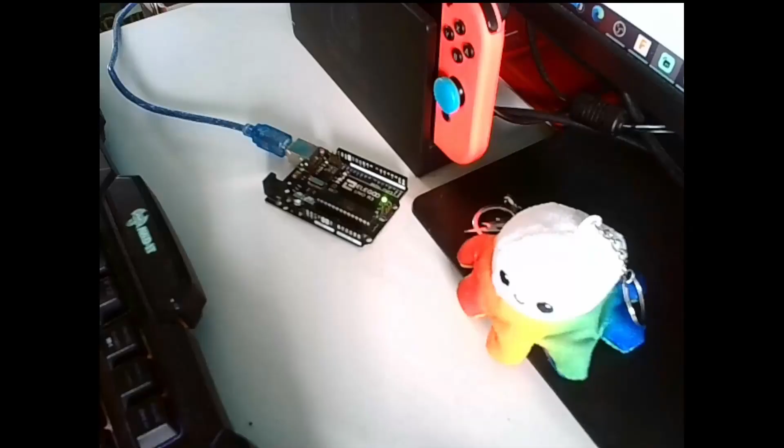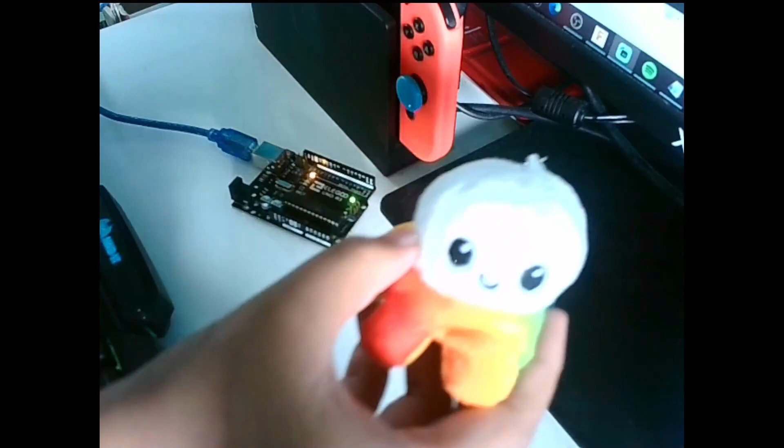So this is my desk, it's a bit dusty. I have my keyboard there. And this is just my mascot, soon to be. I haven't really done anything about him yet, but he's my mascot.

So we're going to be making this Game Boy in 3D modeling software. Before I get into it, first I'm going to be getting the measurements of all the sides, and we're going to be doing the full thing, including these little dips over here, the way this button is coming out. I'm not so sure about these two buttons because of the rounded edge, but I'll work on that as well. And even this little grille kind of thing. So let's get straight into the video, shall we?

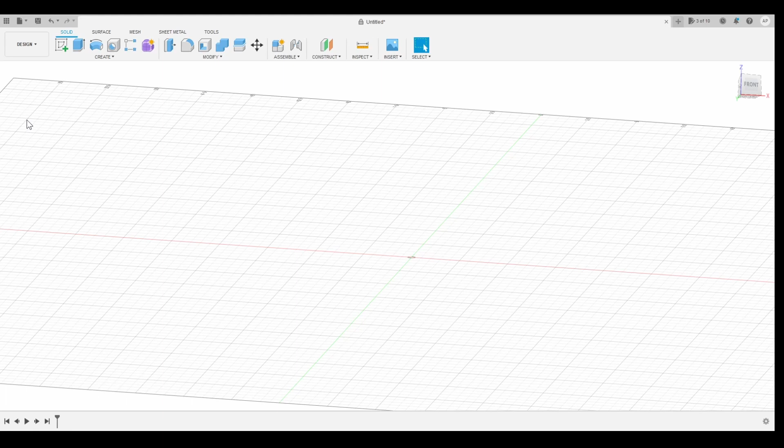So here it is, this is my 3D modeling software. I'm using Fusion 360, as I think I said before. Before we get into anything, you're going to want to go into your document settings and change your units to centimeters, which you just click the pencil and change it to centimeters. Then here where it says the origin, you want the yellow box, so if it looks different, click the button so you get it back. So this is what we want.

Our next step is going to be making the basic shape of the Game Boy, the cuboid, which I can show you now. So we're going to be making this basic cuboid that holds everything. After that, we'll do this fillet to get it rounded, and then we'll do the screens, and then all the buttons I might do in a part 2, so stay tuned for that. Anyways, let's get straight into it.

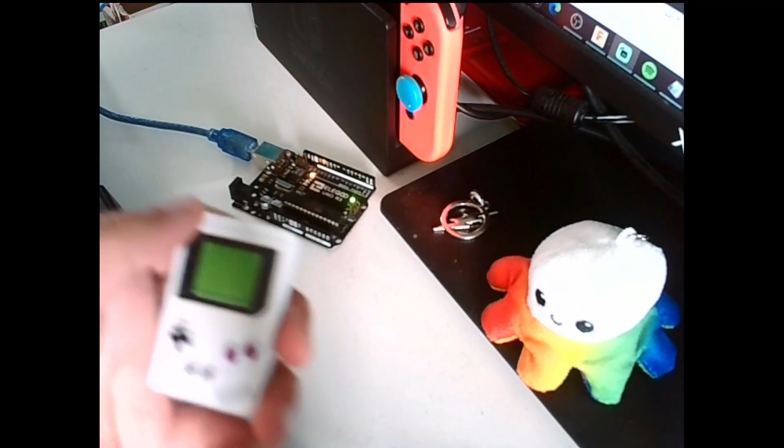So first I'm going to get my measurements. This is 3.3 centimeters, but we'll do 3.5 just to be on the safe side, 3.5 by 5. So let's get that into our modeling software. You can do 3.3, but just to be on the safe side, I'm going to be doing 3.5. So first things first, you're going to want to click this last plane, on the origin, the bottom one.

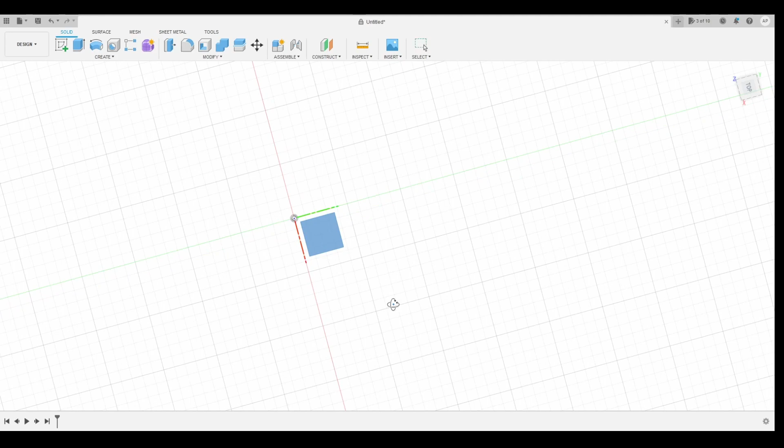Okay, give me a second guys, if I quickly get this back. There we go.

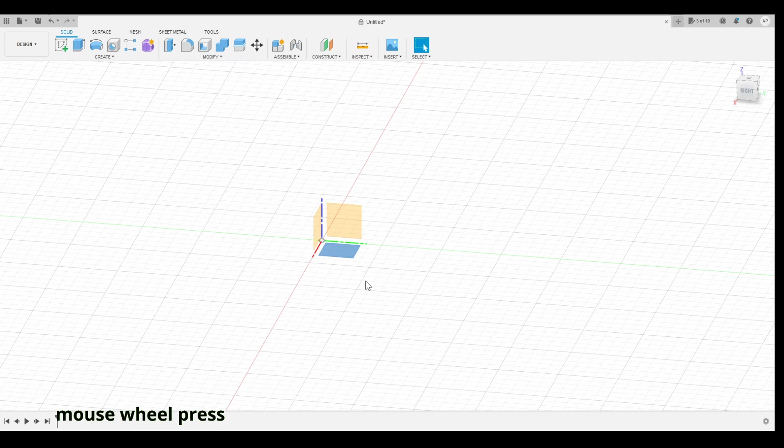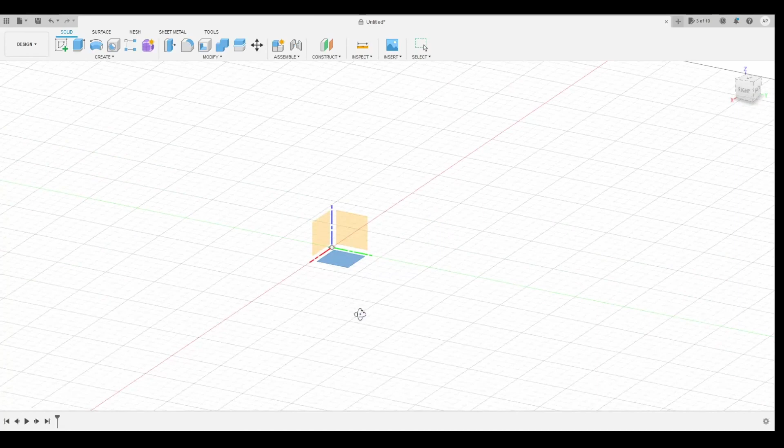If you don't know how I'm moving like this, that means you haven't watched any basic tutorials on Fusion 360. Basically, to pan from side to side, to move the actual thing, you're going to want to hold the mouse button. I'm not sure about laptop, but you can probably Google it. To move it in like this, it's the same mouse button, but you're going to want to hold shift then the mouse button, then you can move the tool. So this is the origin, this is where we're going to be making the Game Boy.

First things first, we're going to click it, then right click and hit create sketch. Now once we've done that, we're going to want to make a 2-point rectangle. A good tip is to use the S menu, the shortcut, so you can have everything you normally use right there, and it's different for your sketches and your normals, and you can even add things. For example, if I was extruding, I could just add my extrude in, but I usually just press pull.

You can add that there, but the shortcut for press pull is Q, so we don't need to do that. Let's make our 2-point rectangle. The best idea would be to do it like this. So like we said before, it's 3.5, and to move to the other one, hit tab.

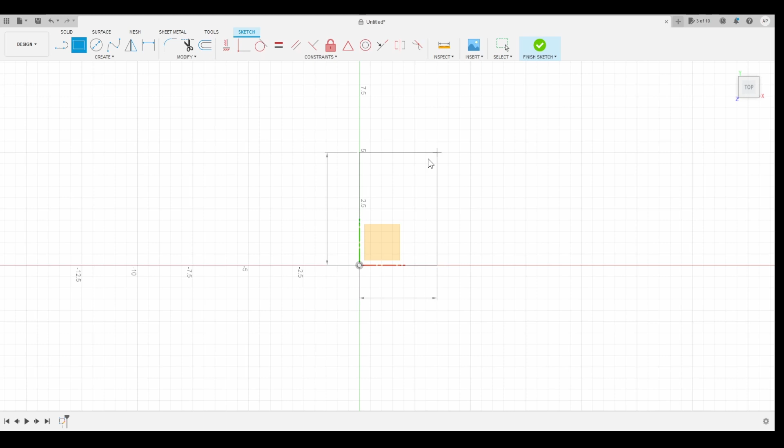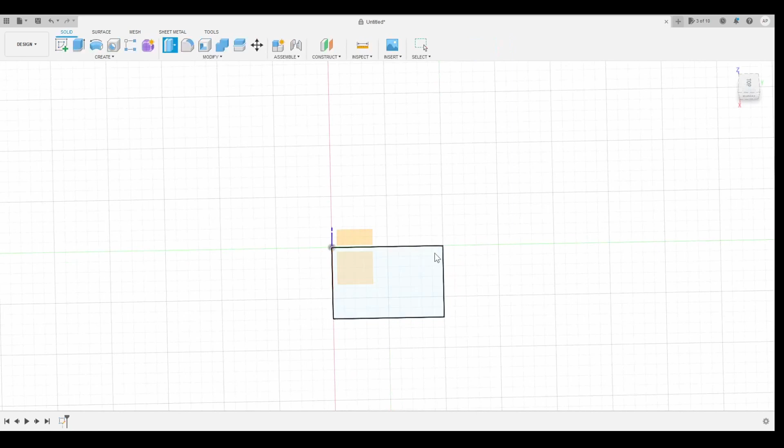And then 5, like that, and hit enter once you're done. So this is our basic shape, but if we look around, we can see it's 2D. We're gonna want to make this a cuboid instead of a normal rectangle. You can either extrude this or press pull. Like I showed you before, you can use the S menu, but for press pull, the shortcut is the Q key. I'm going to click Q, select this, and we're going to want to enter in our height.

So I'm going to quickly measure the model. Just so you know, the model isn't the actual size, it's just scaled down, which is much better in my opinion. But if you want full size, just replace all the numbers I'm doing with the normal size. I'm sure you can get it quickly with a Google.

Oh, that's not where it's supposed to be. Oops, sorry guys.

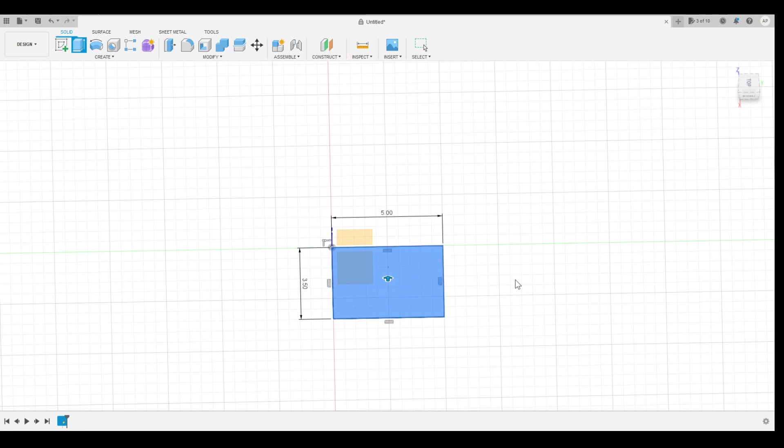Anyways, if we look, our height is 0.7, so 0.7 centimeters. We're gonna go here and type 0.7, then hit enter, and there you go. That is your basic cuboid. This is the exact same measurements, just this is a bit wider than my model.

The next step we'll be doing will be in episode 3, getting this into your slicer and then 3D printing, which will be all in one episode. If you don't know, I'm making this a Game Boy series. In the first episode we'll do the screens, in episode 2 we'll do the buttons, and episode 3 will do stuff like 3D printing it and putting it into whatever slicer you use.

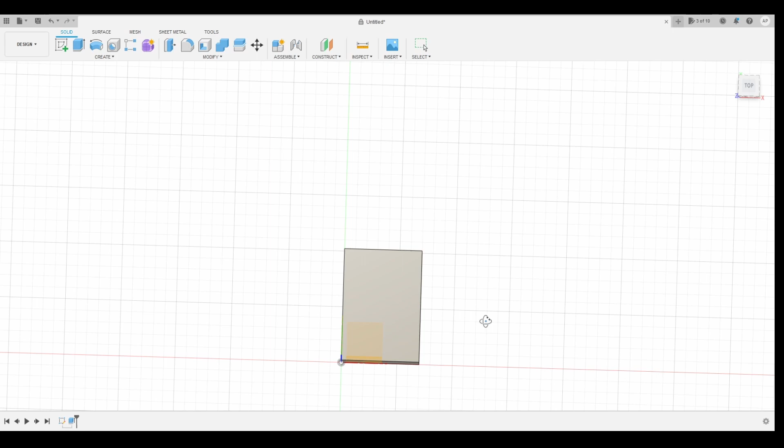So our next step is going to be making the screens. How are we going to do that, I hear you ask? We're going to want to click this, then right click it, and then click create sketch.

Next we're going to want to get our 2-point rectangle from up here, or you could use the shortcut menu, which is S. You can put it anywhere, just don't make it too big. I'm just gonna make it like this.

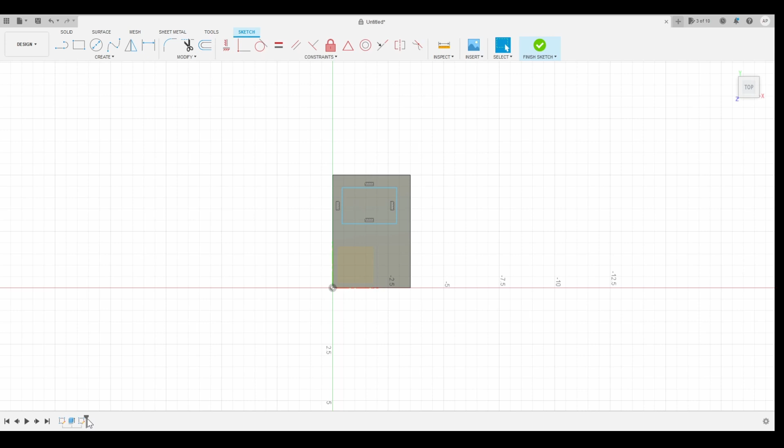Right, now our next step is... okay, never mind, let me get the measurements first. Let me quickly delete that. Let's undo that quickly, Control Z. There we go. So let's get the measurements first.

Oh, you're not supposed to see what I'm wearing or me touching my mouse. No face reveal, so it should be good. Oh, I was not expecting that to happen.

Anyways, if we have a look, the screen is, by the screen I mean all the black in it. If we look, it is 2 centimeters by how much is this? It's 2 centimeters by 2.9, I would say. Okay, I kind of just forgot what I said. 2 by 2.9. Okay.

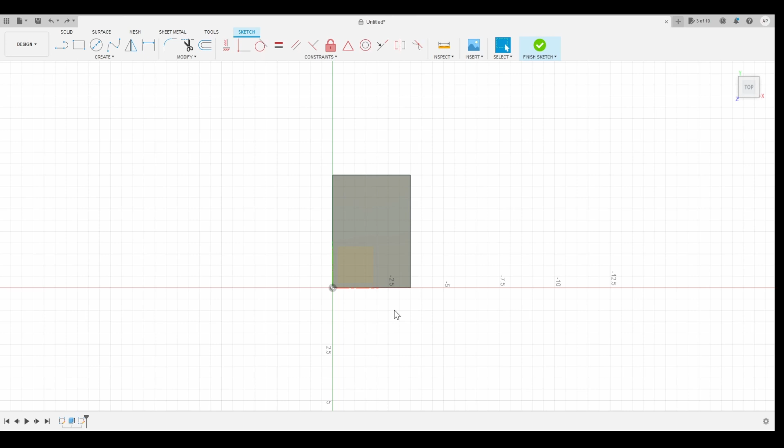So 2 by 2.9. So let's make a sketch. Actually, I think we're already sketching. So it's 2.9, then hit tab to move to this one, which is 2. Hit enter. Now you will notice this is definitely off, because if we have a look, first things first, it's 2D and it's completely wrong.

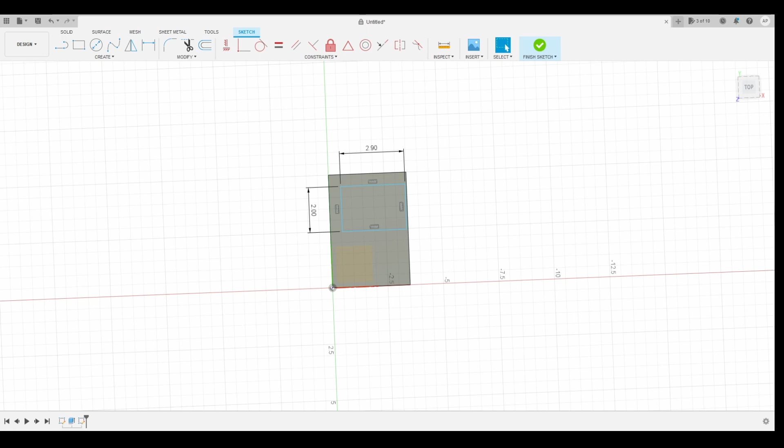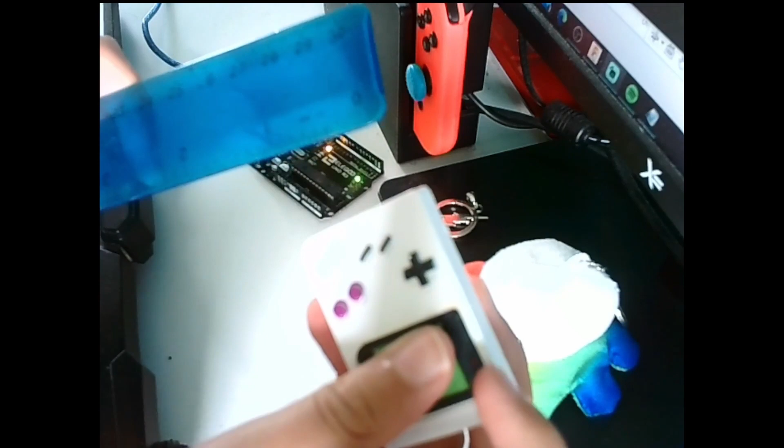So if I move back to my camera, okay, there's the model. Give me a second, I'm moving my chair. Right. What we're gonna do is we're gonna measure the distance between the white and the black edge, not in inches, in centimeters.

This looks like 0.2, yeah, 0.212. And then the other side is also 0.2. So it's 0.2. So how are we gonna make that, I hear you ask? Said no one ever.

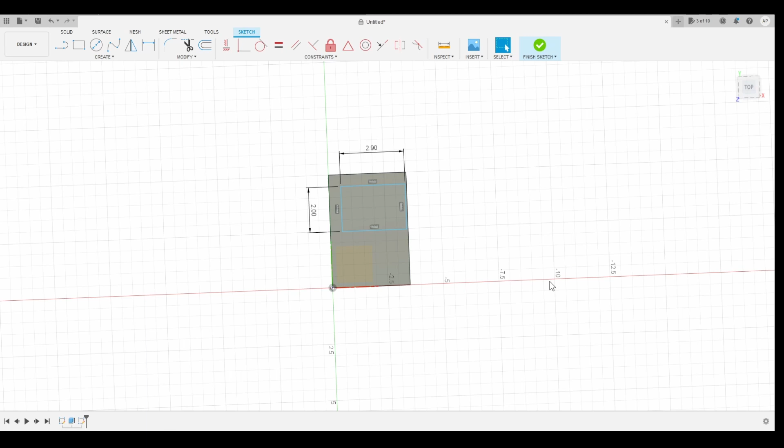We're gonna hit the D key, the distance, or you could use the shortcut menu and search it there. Click this side and bring it to this, and then pull it all the way down. So this is 0.2, did I say? I think so. Let me double check, I'm bad at remembering measurements, so I don't know why I'm making a 3D modeling video.

Anyways, this is 0.2, and next we're going to be doing the distance from here to there, which I am measuring is... by the way, if you're liking the music, I'll probably leave a link to it in the description, it's just some non-copyrighted hip-hop. It's 0.5, the distance from here to there.

So let's add that. From here to here is just 0.5. Okay, this is definitely not 0.2. Yeah, I definitely made this too big. I don't know why I did that. It should do, but I don't want to have to redo the whole video again. This is my second time doing it. It should be okay. You know what, I'm just gonna do it.

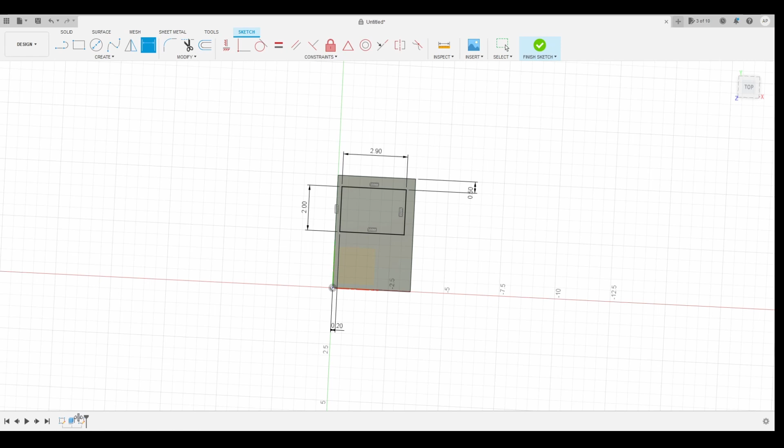Go back to my original sketch. If you don't know, just use the timeline at the bottom. If I just move this away from behind the sketch, it won't let me. Let me finish the sketch. Bam. And then double click this.

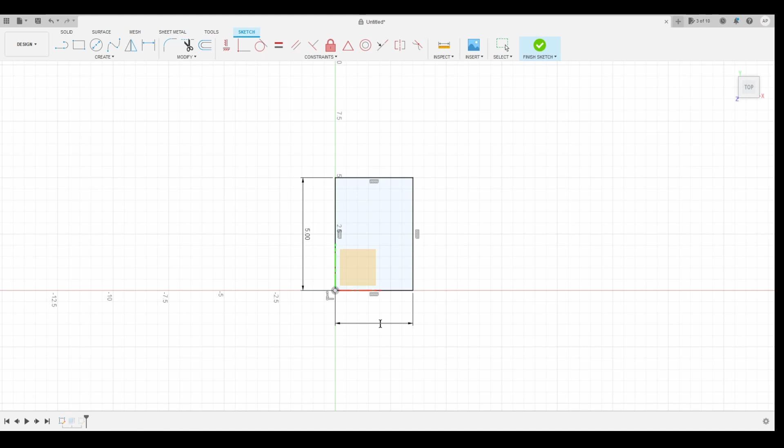So I'm gonna change this back to the, how much is it actually? It is 3.2. So let's change this to 3.2 and then hit enter. Okay, then we're gonna hit finish sketch and move it to where we are now. That's definitely much better. So now we have the screen.

You may realize something - firstly there's another screen here underneath, and on my model the screen is a bit underneath too. There's a bit of a difference, and also this one's underneath that in terms of height, so it's cut in. And the next thing you'll notice is this edge - it's rounded compared to the normal corners of the other sides.

So how are we gonna get this edge rounded? And for those of you thinking I was gonna miss that out, no, I'm not. We're gonna try and get this as exact as we can without being total nerds who need the exact .1. So let's do that, shall we?

So first things first, we're gonna click our S key again and get our fillet. Next, we're gonna shift mouse wheel button again and click this edge. I'm gonna say probably 0.3 centimeter, no, 0.1.

0.5 actually. Nope, that's definitely too less. Let's undo that. Probably something like the whole thing's, so probably 0.5. 0.2. Yeah, that looks, is that it?

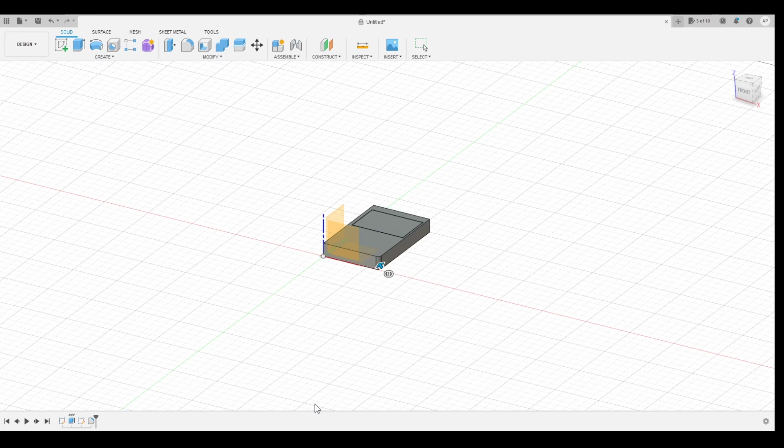Well, let's find out. So it's just a slight cut, not much to notice. If I switch over to my camera again, we can see that, yeah, there's a bit of - let's move that out, super dusty.

So as you can see, it's not very rounded. It's probably a bit more than 0.2. Probably like 0.2, I'm gonna make this like a 0.3. Yeah, 0.3 seems good, and then we'll get a rounded edge. So double click it in the timeline, change this to 0.3. Yeah, that's much better.

Right, now we're gonna move back to the screen. If we look at the screen again, we'll see that this edge is much more filleted than this edge. Like, that's hardly noticeable. This one is. So let's fillet this edge as well.

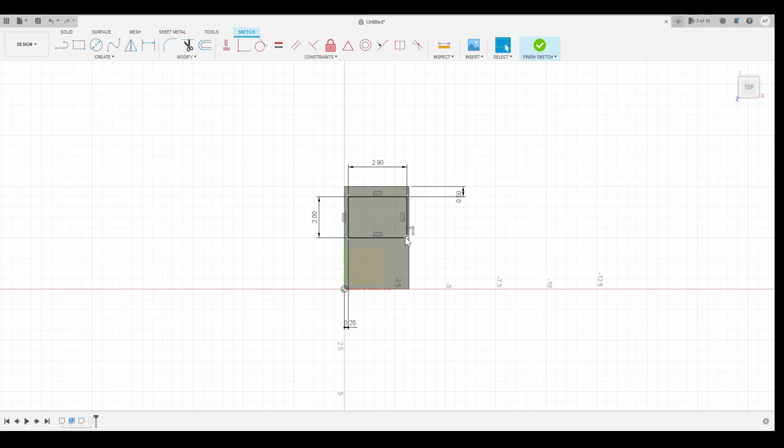So we'll get our fillet tool back. S. Get - yeah, here. Let's get our fillet here. Huh, I don't know how to do that. Okay, Control Z, by the way, to go back to where we were.

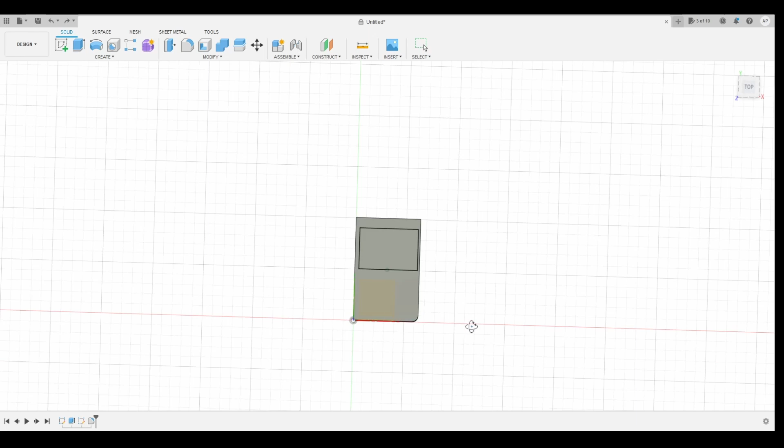I think we need to extrude it first. So how we're gonna extrude it in is we're gonna click Q, which is press pull, or you could extrude it - I don't know what the difference is. So I'm gonna click this. It's probably like minus 0.01.

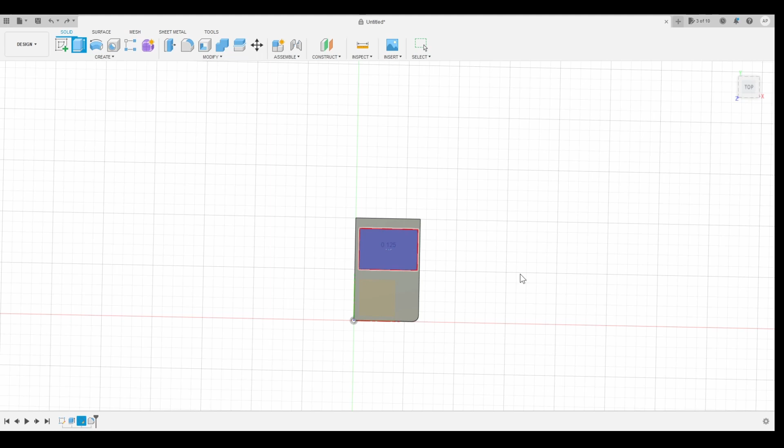Or 0.2. Actually, no, it's probably 0.2. No, it's not - 0.125. Yeah, I think that should do it. There we go, and you can see it's just slightly embedded in.

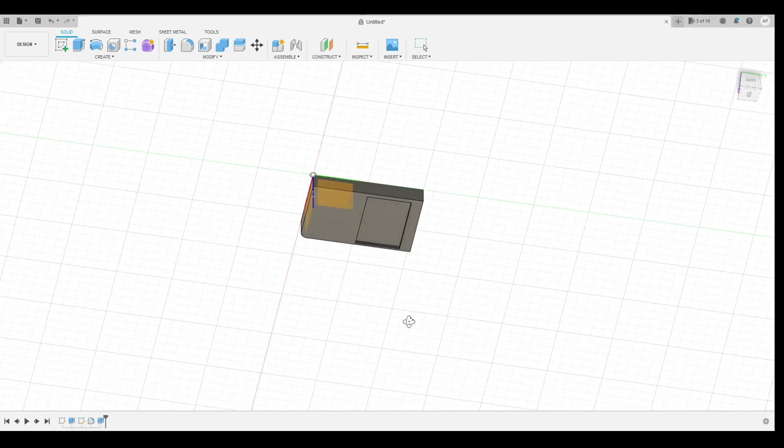So it is a design, so I'm guessing it has something to do with the painting. Wait, what did I do? Oh, never mind. Whoa, that was trippy. I thought it was like cut at the bottom or something. I don't know.

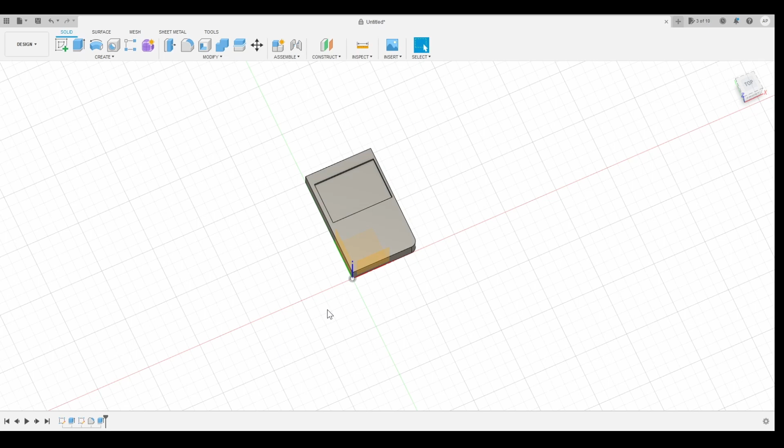So we have the basic thing. I'm looking at my model now, and I really don't know how they did it. It's rounded, so I have no clue, I don't know. This is why Blender is better. This is why I'm moving to Blender.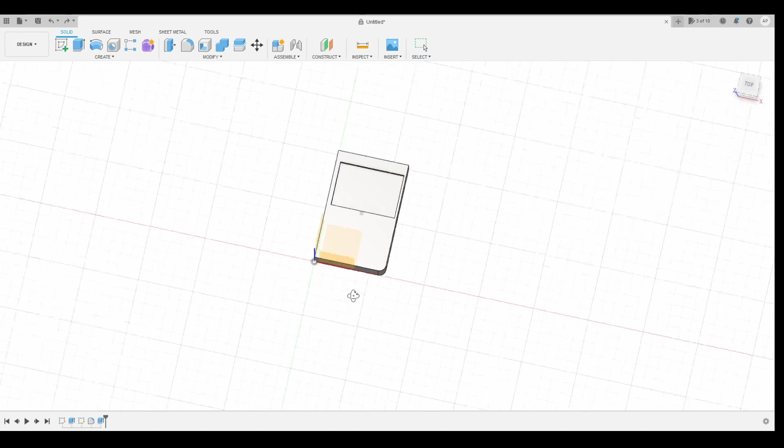So I sort of found out how to do it. Let me go back to our current position. Control Z, back to where we are. So this was our previous state. How we do it is actually, I'm just very dumb. Okay, I got that trippy illusion again.

Basically what you need to do is go back to your sketch 2, the sketch where you made the screen, and double click it. Next you're going to want to hit S and get our sketch menu. Then we're going to search fillet again, but this time use this fillet instead of the 3D fillet.

So let's do that. I'm going to click this corner, and then try 0.5 — oh sorry, 0.5 is probably too much. Yeah, it definitely is. So we're gonna make it just a tiny bit, like probably 0.4, maybe 0.35. Yeah, that looks about right. Actually, it's a bit too much. I'm gonna do like 0.1 and see how that turns out.

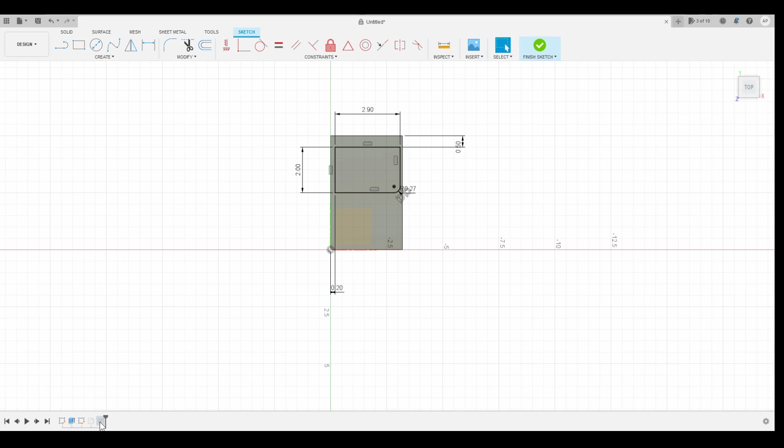No, basic 0.25, 0.27 — yeah, 0.27 looks about right. And there we go, we have our fillet. So now we just finish the sketch, and there we go. If we're back to where we are currently, pretty cool.

So far we've got the basic screen, this edge, we've got the rounded box for the actual Game Boy, and now all that's left is to do this screen. I think we might leave that till next episode. Actually, you know what, let's do this as the last thing we do then, this screen, and then after that — no, that's the wrong word — we're going to stop the episode, and then I'll see you guys in episode 2.

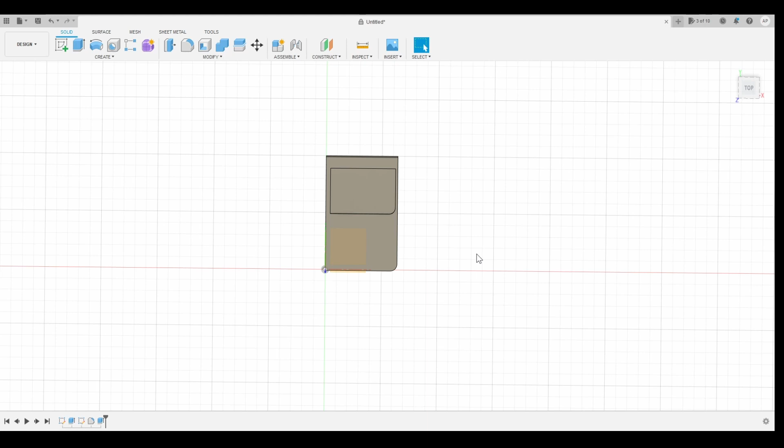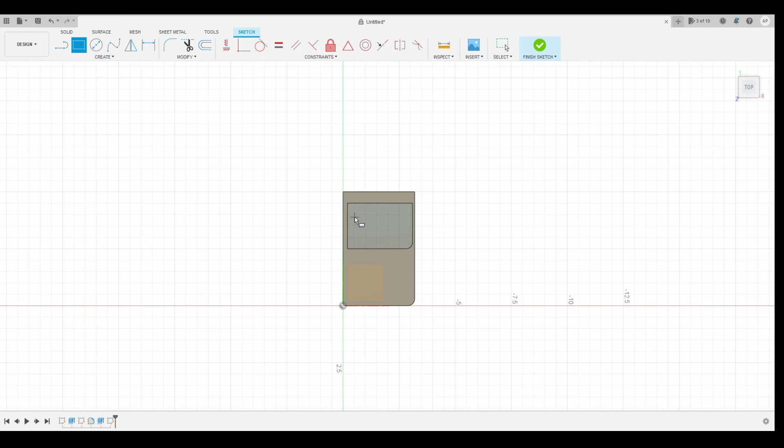So let's get into this. This extrude that I used to push this down was 0.7, so we're going to be doing 0.5 on this one. First things first, we're going to create a sketch, and looking at the measurements now, it is 1.7 by 1.9. So we're gonna create that: put 1.9, hit tab, move, then do 1.7. Hit enter. That does look a bit out of place, but we'll use the distance key in a second.

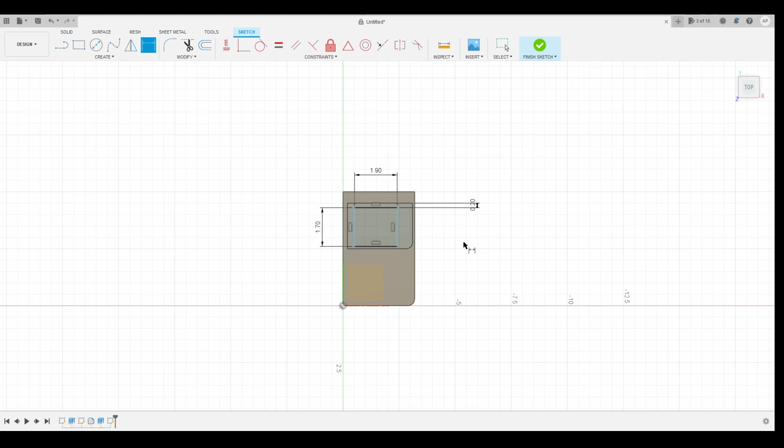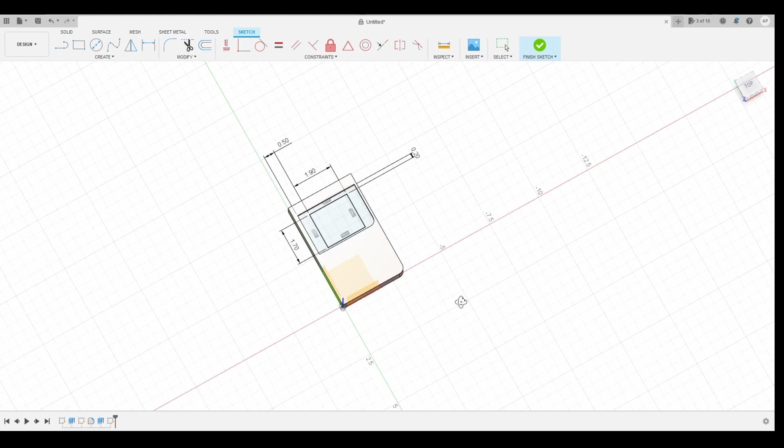So the distance from here to here is — I'm quickly checking — 0.2. We're gonna get our distance from here down to there, and it's 0.2. Then the distance from here to here — oh, that's inches, never mind — it is 0.5. Here to here is 0.5. Okay, and that's literally it. That's the green part, and we're just gonna cut that in now.

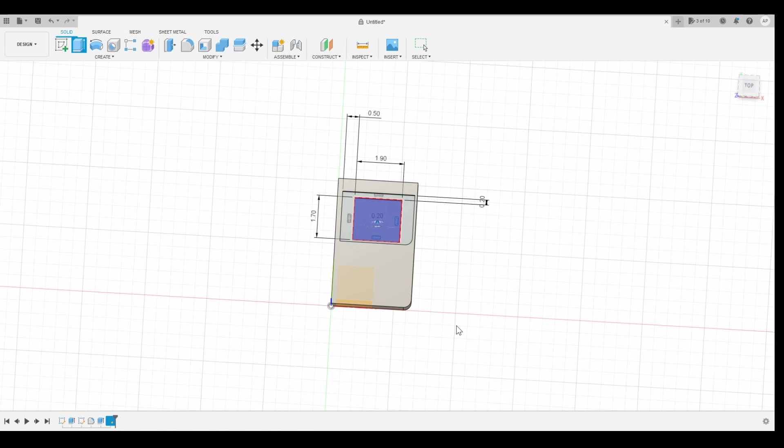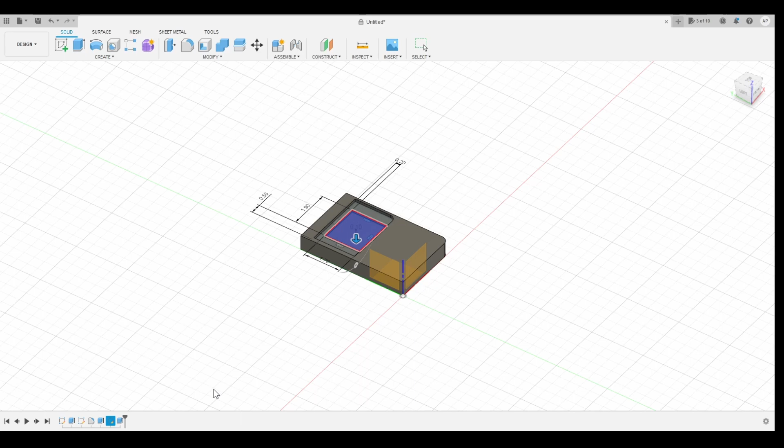So you're gonna click Q, select -0, -0.2, and I think that's actually good. Actually no, that's way too much. In fact, both of these are way too much. This little thing is probably about 0.1, so let's change that. Change this to 0.1, hit enter, and change this one to 0.1, hit enter.

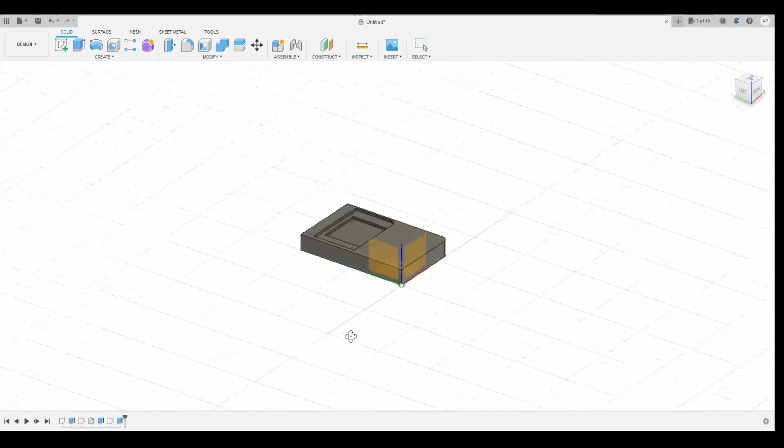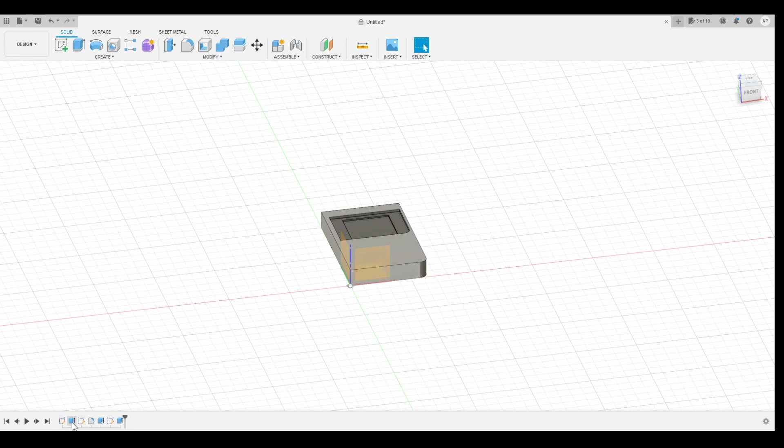Okay, and so far so good — we have the nice screens. Actually, it's probably 0.5. Sorry guys, I don't have exact measurements because I'm using a model I won at the arcade, so not the best idea. I'm gonna do 0.5. Change this one to 0.05. If you guys are stuck on anything, leave it in the Discord server and I'll see if I can help you. I'm not an expert at Fusion 360 — this is my second project, so I'll do my best.

Oh, I know that noise — someone followed. Thank you, Roll CT, for following. If you don't know, that's just my other stream going right now.

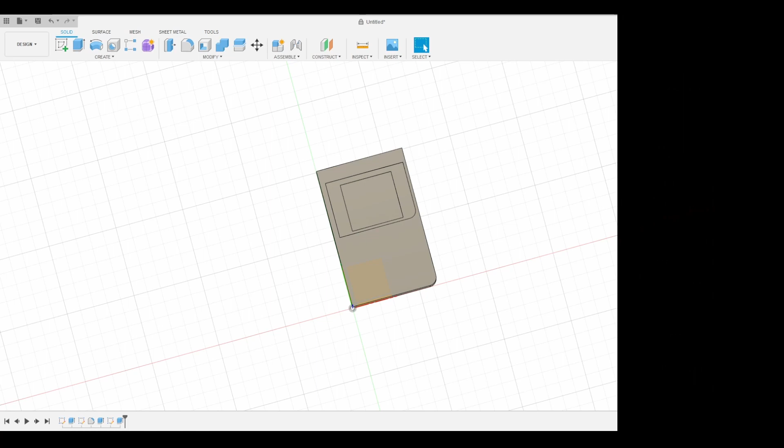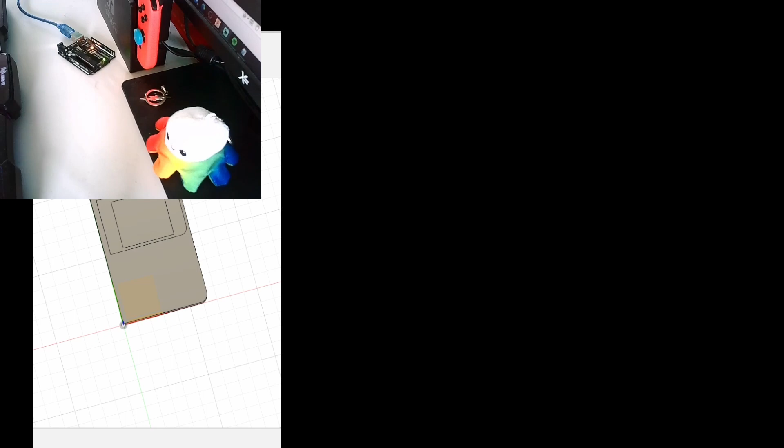So, as just a comparison, I'm just gonna quickly delete this. Come back here. Cut — I think it's Alt to crop. Yeah, Alt is cropping. Okay, and then we're gonna put it side by side with our webcam. Done. There we go.

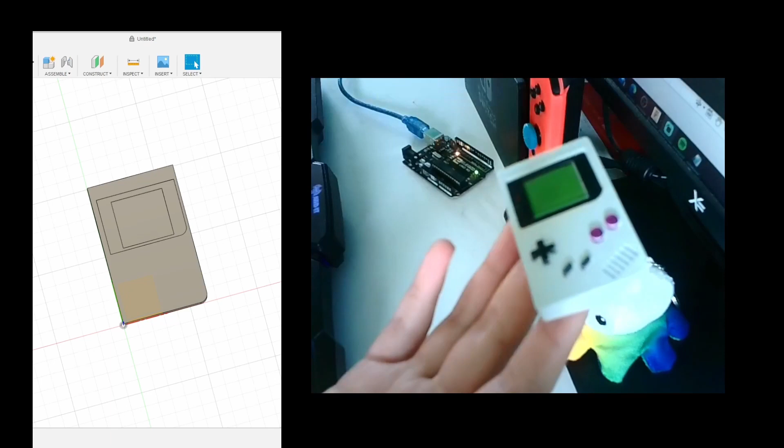So this is a side by side comparison. If you have any problems, probably just comment it and I'll try to get back to you.